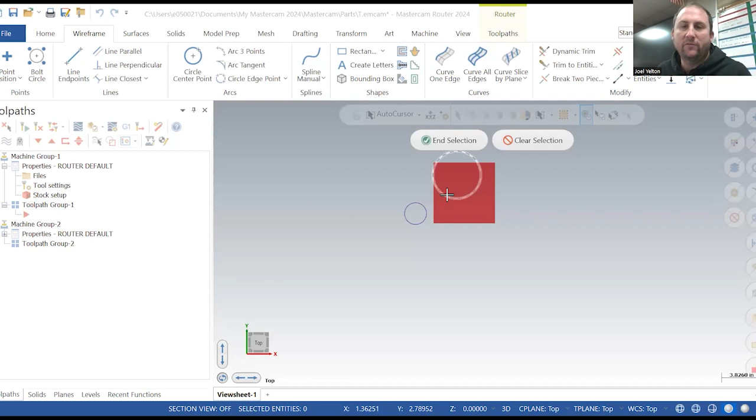All right, people, here we go. Let's see if I can get this. We're on MASTERCAM 2024. It is a little bit different as far as the initial setup, so be patient.

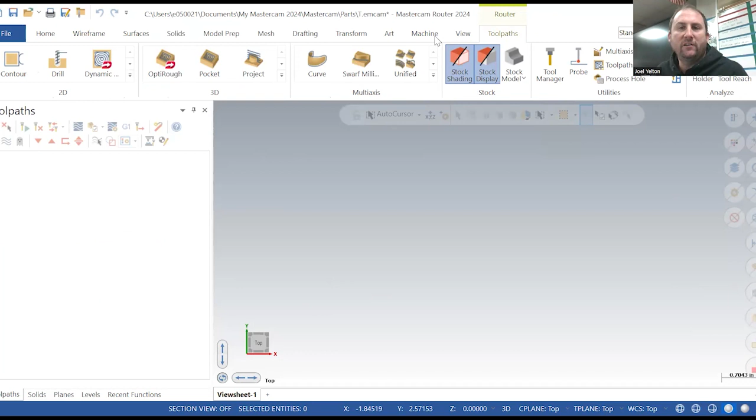Okay, so here we are. I want machine, router, default, just like normal. And I'll show you where things get a little wonky. If you don't have anything right here, let's go to view and just make sure our toolpath tab is on. So there it is. I'm going to double click properties and click stock setup.

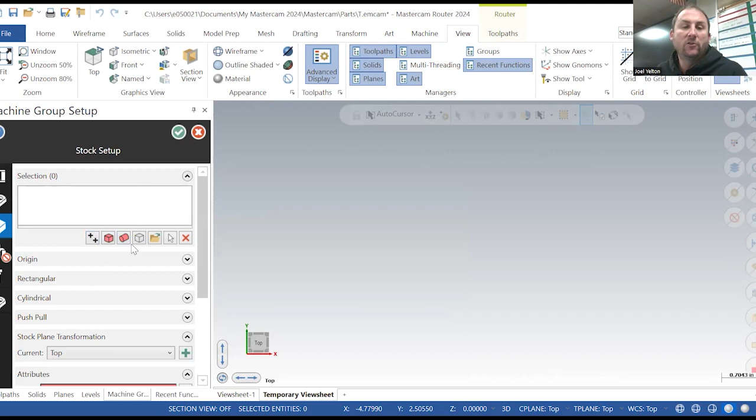And now our piece looks a little different if you had been using MASTERCAM anything up to 2022. So we're going to do this first. We're going to go to add from a bounding box. I'm going to put this at the lower left, and then I'm going to put my dimensions in. So in this case, I'll do 6 by 6 by 1, and I'll hit check. Then I'm going to hit check again.

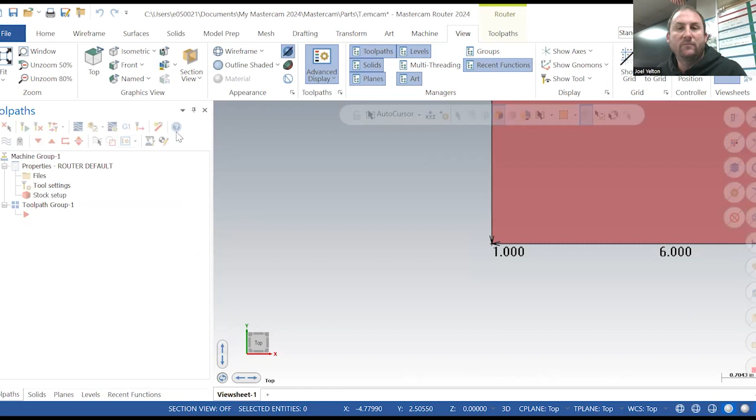And now I'm going to go up to toolpaths right here, and I'm going to hit stock display, and then I'm going to hit this. Now I'll go to view, and we'll go to fit, and make sure you're on top. So we're back to how we normally used to do things if you've messed with this. If not, it doesn't matter. Now you know how to do it.

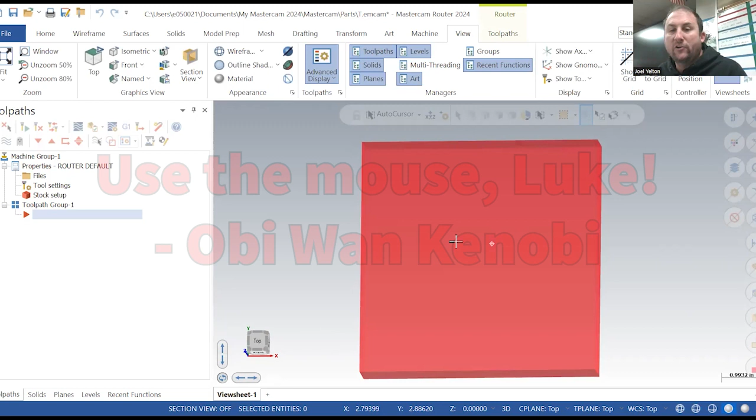So I have 6 by 6. I'm using my mouse. Make sure you're using a mouse. With the center wheel, I can rotate this in 3-dimensional space, all right? And you've got this bar down here that tells you what view, front. So look down here, left, bottom, back, right, top. Now, it's really hard to design if you're not at a perfect flat angle.

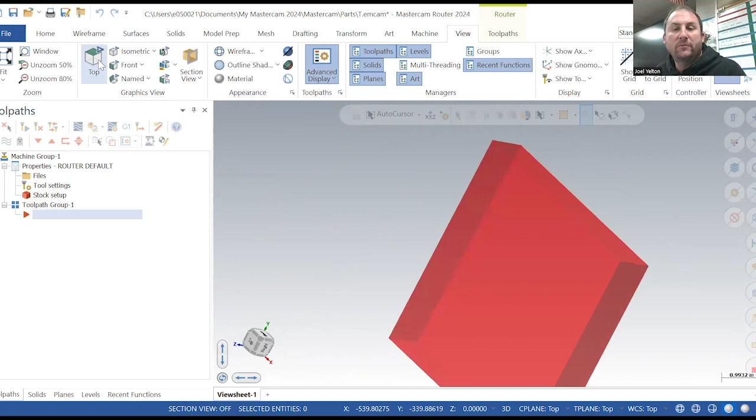So if you mess up by hitting the scroll wheel, just go over here to view, top, and it puts you back. And then you can hit fit, unzoom, etc. So this is just giving you some basics of manipulating the piece. If you want to move the view down, you're going to use the arrow keys. All right, so you can see how I'm tapping those arrow keys.

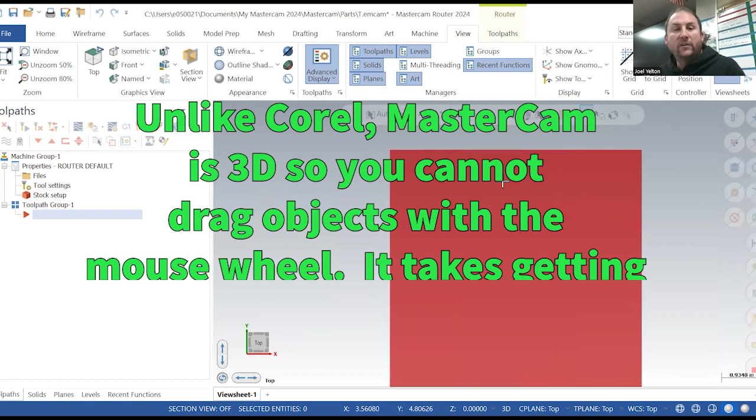And then again, let's just say that you lose your whole piece. I'm holding down. I'll just go to view, top, fit, bloop, brings it back. Perfect. So let's get started making something.

We're going to do something very simple today. I'm going to go to wireframe. And remember that this workpiece dimension is 6 inches by 6 inches. So whatever I'm going to machine, when possible, I want the workpiece to be slightly bigger so that I don't have to worry about hitting any of the jigs or the holders in the workpiece.

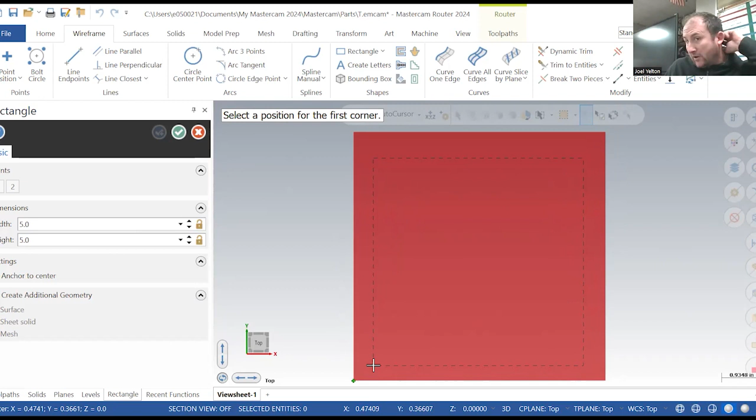To start, we're going to make a rectangle. And let's make it 5 by 5, which, yes, is a square. And then it says select position for the first corner. So if you see down here, look at this X and look at this Y. And if I get down there, they all turn to 0, 0, 0. Okay. So if I have a 6 by 6 box with a 5 by 5 box in it, that's a ½ inch on each side.

What I'm going to do is hit the space bar. It opens up this little box right here. And I'm going to put 0.5 over, comma, 0.5 up, and hit enter. And now that box is perfectly centered, all right? The point of me showing you this is that you understand that you can see where a selected point is.

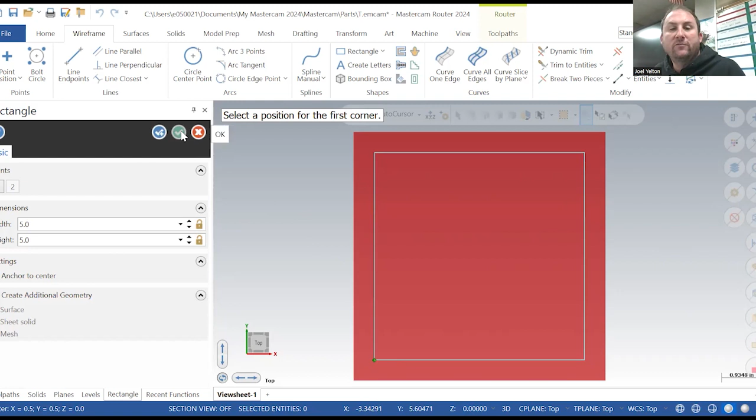In this case, it grabbed from the lower left. But rather than trying to manipulate it with the mouse, which you're never going to get it exact, you can just hit the space bar and type your first 2 X and Y dimensions in. So in that case, we did 0.5 over, 0.5 up. All right, you're good. So I'm going to hit check, the green check to finalize this. And then I'm just going to hit escape to get out of the command.

Now I am still in the wireframe tab, and I'm going to go over here to create letters. And I want you to type your first name and last name. So notice I'm going to say Joel, and then I'm going to hit the enter key and do my last name. Leave it on this default font at this point.

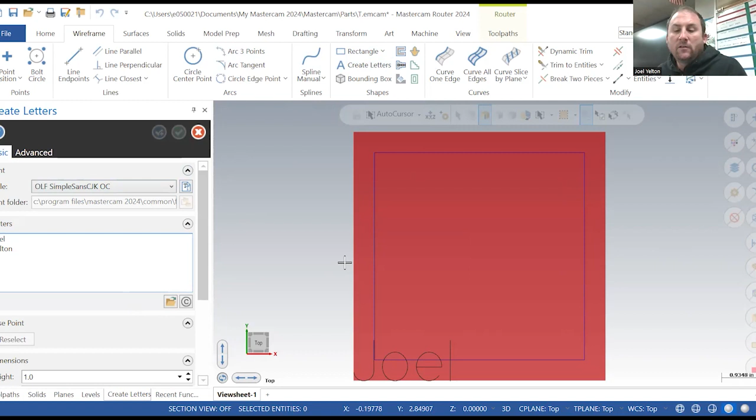I'm going to hit enter. Sorry, I'm going to click, and it puts it right there. All right, so let's cancel that. And I'm going to show you kind of why. So now it still has the last thing I typed, and it's following the cursor. I can put it exactly where I want.

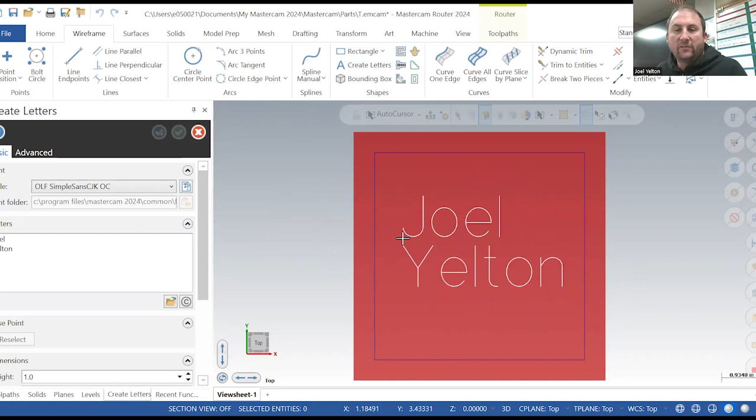Okay, that looks about centered, and I'm going to click, and then I'm going to hit the green arrow.

Now what we're going to do is run a toolpath, very simple, on one part. Go to toolpath, and we're going to go to contour. Before we do this, I'm going to explain what all of these are.

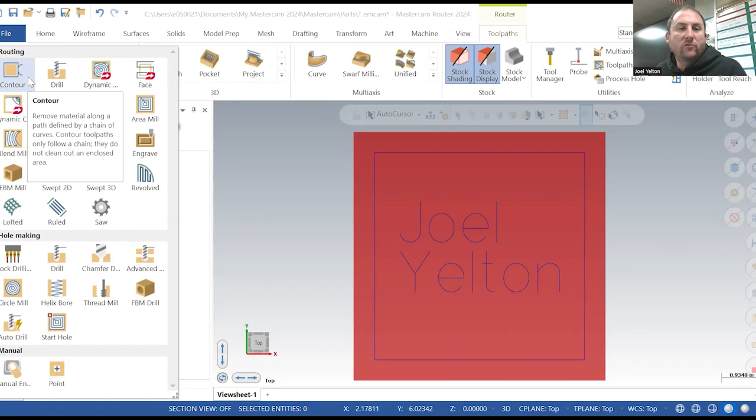We're using 2-dimensional, don't use 3D, it will mess you up. The contour shows this little half loop in a square, meaning it comes in, goes all the way around the square, and comes out. The drill is saying it just makes a hole. We're not really going to mess with these.

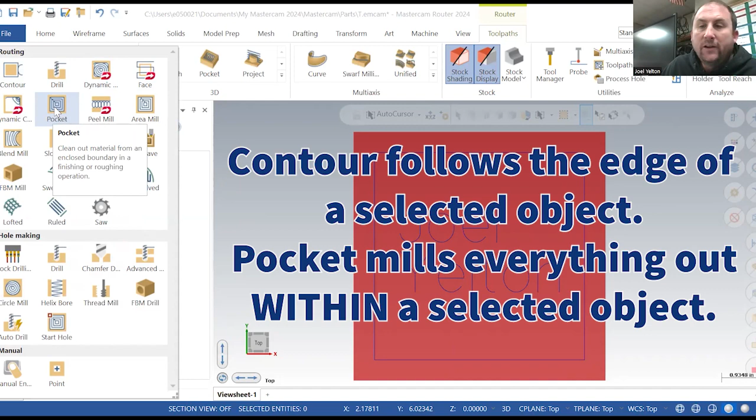The only other one we're going to use in these early videos is pocket, and what pocket does is remove the whole inside out of a selected shape. So contour just goes around the shape, pocket removes everything in the shape, and drill drills holes. So, contour.

Here it's going to tell you the selection method of how you want to grab the piece. You could do a window, and drag the window over the whole thing, but the problem is I do not want to machine the letters at this point, so I'm going to do chain.

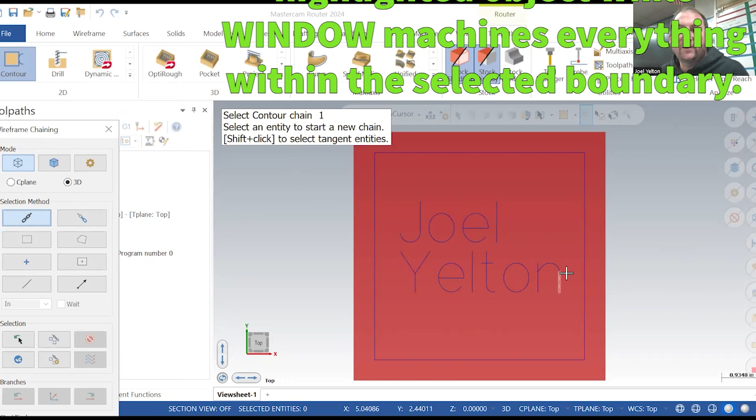I'll click chain, and then I'm just going to click anywhere on the 4 lines that I want to machine. I suggest just getting in the habit of lower left.

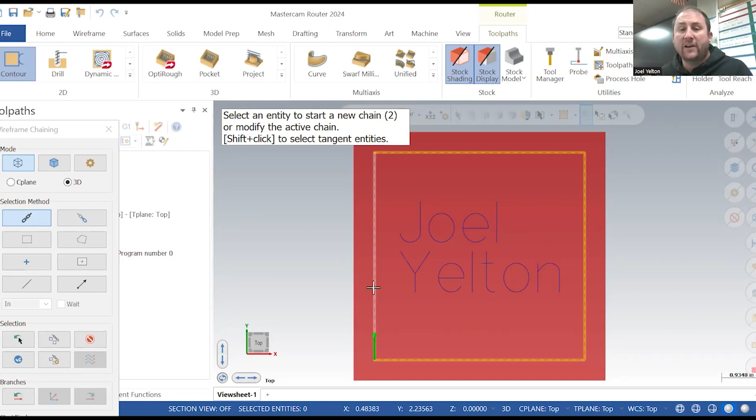Now the first thing we want to look at is the arrow is going up, right? Do I want it to cut in the center of the line, to the right of the line, or to the left of the line? In this case, we're going to say we're going to cut in the center of the line. I'll drag this up, and I'll hit check.

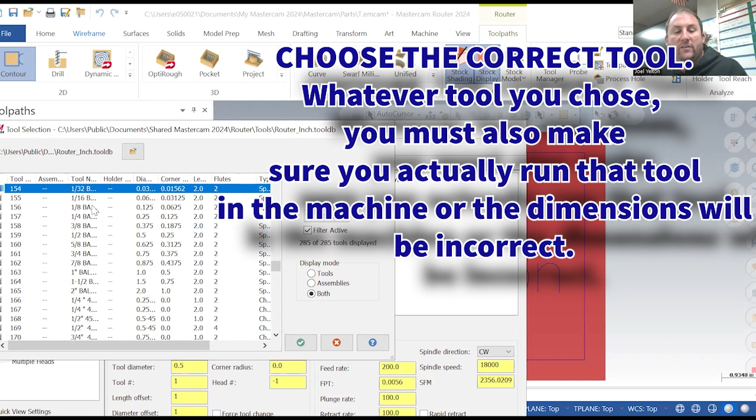I'm going to go to tool, and then select tool from library, click this, and type 145 - there we go, that's a 1/4 inch straight end mill.

I'll hit check, turn this off and hit check, and bring this up where you can see a little more. I'm going to change the feed rate, which is how fast the bit moves through the wood, from 200 to 100, put rapid retract on, and change the plunge rate to 75.

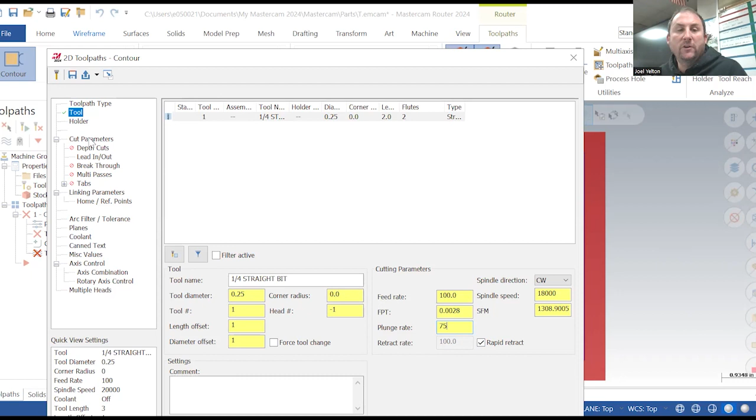That should be good for there. I'm not worried about holder. I am going to go to cut parameters, and right here you can see it's on computer left.

So earlier our arrow was going up. Sometimes it's going the opposite way, right? So it's either going up or down, left or right, forward or backward, whatever you want to call it. Since it's going up, if I wanted to cut to the outside of the line, I would put it on left - notice this changed. If I wanted to cut to the right of the line, I would put it on right, and if I want to cut in the center of the line, I'll turn it off.

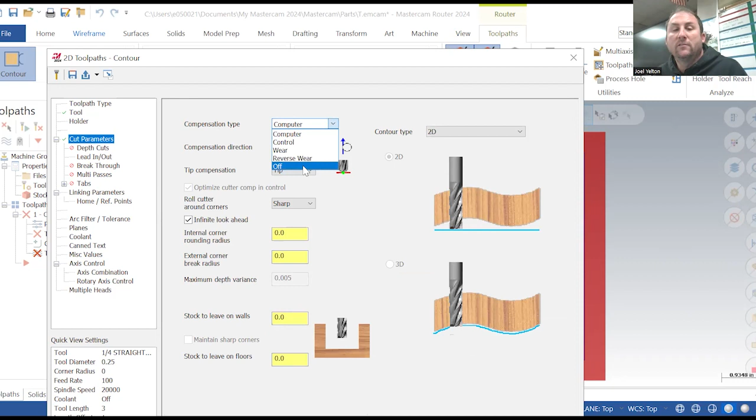So now we're cutting in the center of the line. We're going to put depth cuts on. I don't want to take everything out in one pass, so I've selected depth cuts, and it's saying the max amount it will take is 100 thousandths, which is a little bit under 1/8 of an inch.

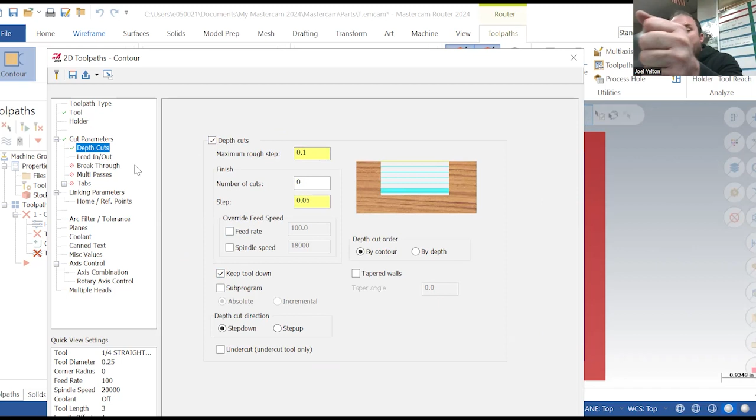And I'm going to tell it to keep the tool down. This way, as it makes the pass, it won't come up, go back, go down, and make the second pass - it will just make the pass, come back, go down, make the pass, come back, go down, make the pass. If we were making 10,000 pieces, this could save us a lot of time, and if we save time, we're saving money.

Lead in, lead out, I'm actually going to turn off. So the little kind of C that we saw when we looked at the contour button, it's going to remove that - you can see the same thing right here, but I am going to turn that off.

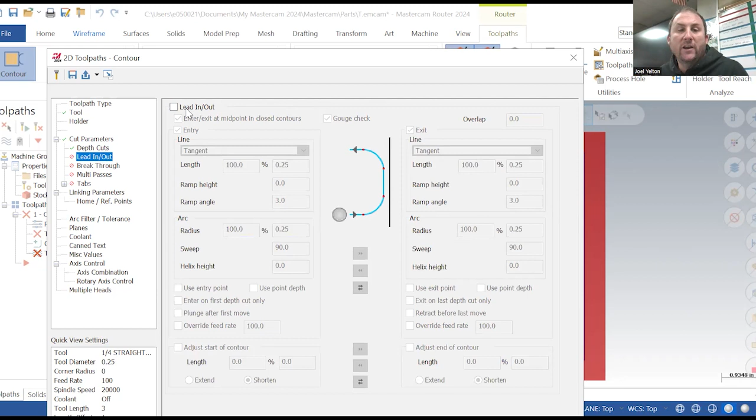Breakthrough, I'm not going to break through right now. Multipass, I do want on, and I'm going to tell it to keep the tool down and machine finish passes after roughing all contours. What this does is instead of machining a pass, making a finish pass, machining a pass, making a finish pass, it's going to do all the rough passes, and then come back and do one finish pass. Tabs, I do not need on at this time.

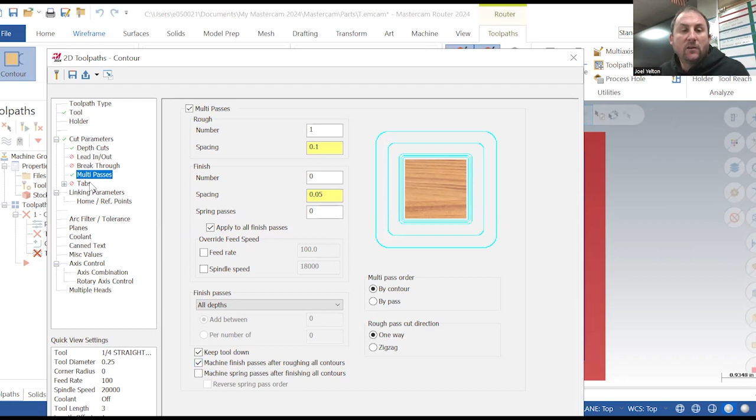On linking parameters, I'm going to turn clearance on. I'll turn it to 1. We're going to go absolute, absolute, absolute, absolute, absolute. I'm going to give you a very quick definition of this. Absolute means that as the machine makes a move, it goes from A to B. The next move is calculated from wherever it ended.

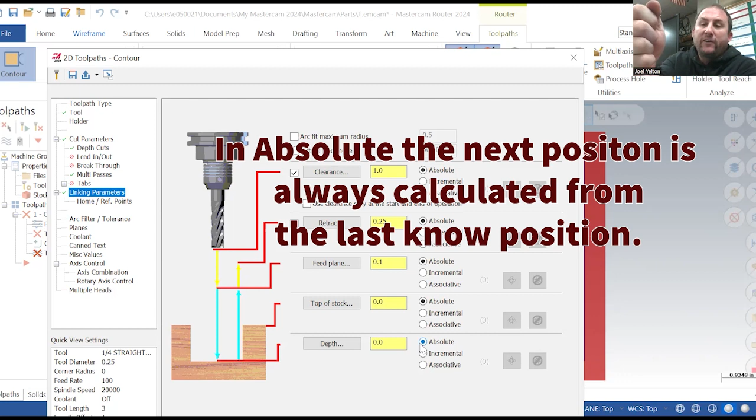All right, so we're at B, and it's going to calculate B to C from that point. Now we're at C, and it's going to calculate C to D from C. If we're on incremental, it is always calculating from the known position of 1, which means that if you have any mistake, it's going to compound onto every other mistake.

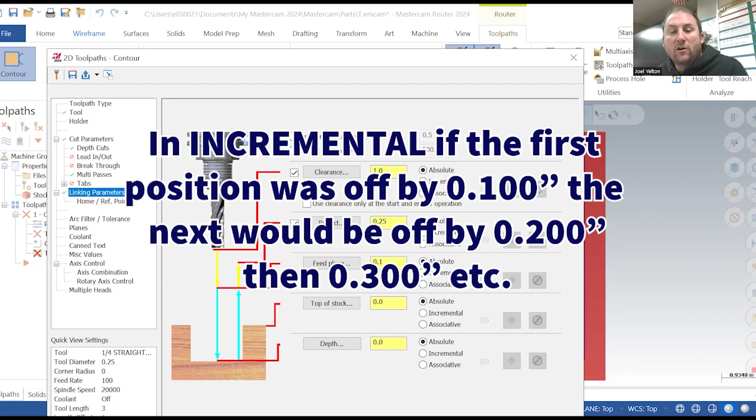So let's just say you are making a series of holes with the drill. If you're on incremental, if the first one is off, it's going to get off by that much every time. And eventually you'll start seeing a big difference. So for what we do, we stick with absolute. Everything else is good. We're going to go to depth.

Super important to note that the depth is going to be negative because we're going to 0 at the top of our 1-inch workpiece, and then we're going to go negative to work into it. So in this case, I'm going to put negative 0.25. That's a negative 1/4 inch. Again, negative 0.25. If you don't put negative, it's just going to hover above.

If you put negative 2.5, it's going to try to drive 2.5 inches down. It's going to wreck the machine, the table, and your part. If you put anything other than negative 0.25, it's going to be wrong. And we can check this by saying, so I'm just going to say that I'm a new student and I accidentally put negative 2.5, and we'll go ahead and see what happens.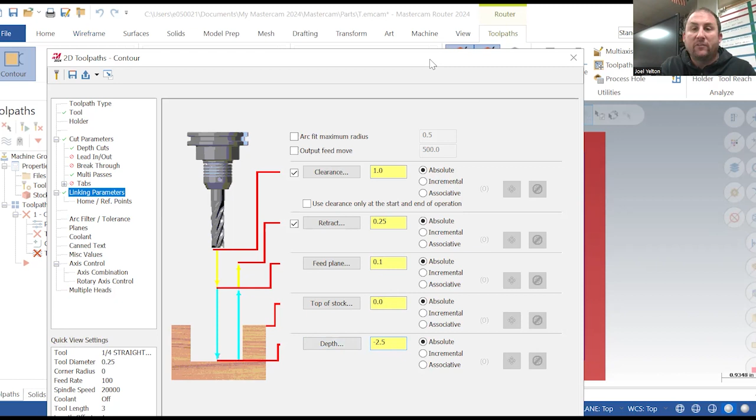So I'll move this up. Try to move this up. So we're going to go 1 inch here. I know it's smaller and harder to see. I apologize. I'll try to fix that in a minute. On the depth, I'm going to put negative 0.2. Sorry, negative 2. And this is wrong, so don't follow me on this section. And I'll hit OK.

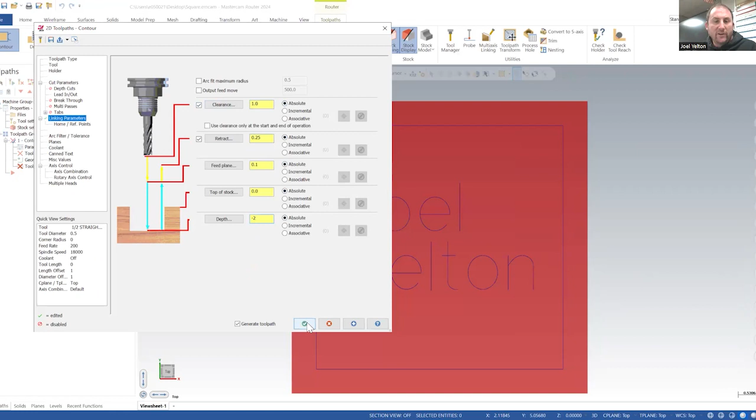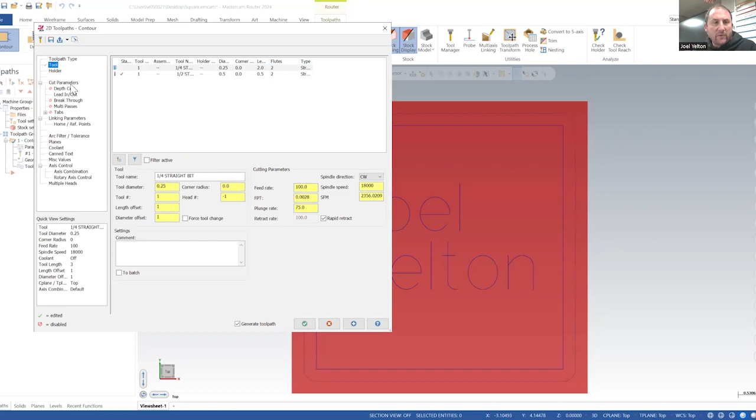Now, the goal was that I did not want to do that. Also, you can see I have this turned on. So I'll go back through my parameters and I'll show you why. I want that bit. I want it at 100, plunge rate at 75, and a rapid retract. I basically have to do the stuff over that you just did. So if you already did this, don't follow me.

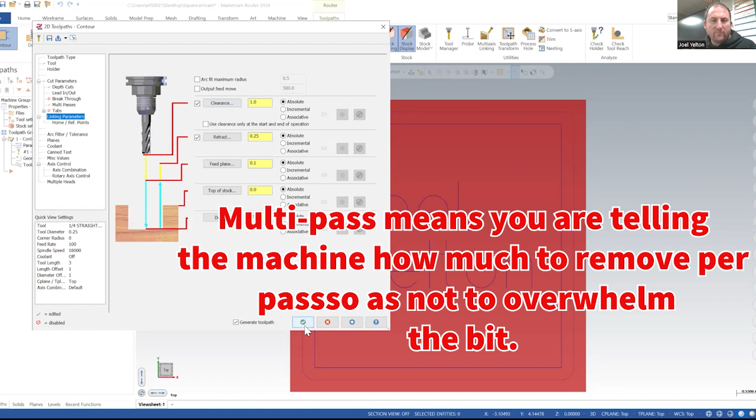Depth cuts, yes. Keep tool down. Lead in, lead out. We'll leave it on for now. I'll show you why. Breakthrough off. Multi-passes on. No tabs. Parameters good. Okay. So here we go. And I'm going to go right here. And this is just a verification mode. It's going to do a simulation for us and show us what it would look like if we actually ran this.

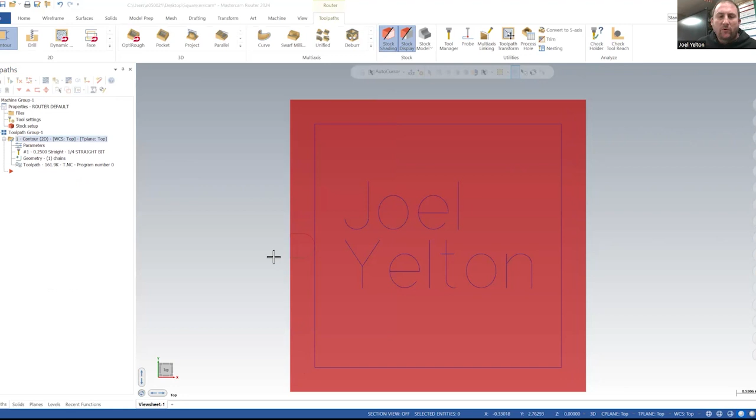All right, so I'll press play, and I'm actually going to tilt it with the wheel so you can see it better. And remember, I only wanted it to go 1/4 inch originally, and now it's gone the whole way through, okay? And it did the lead in, lead out, where it's coming in and then going back out through there.

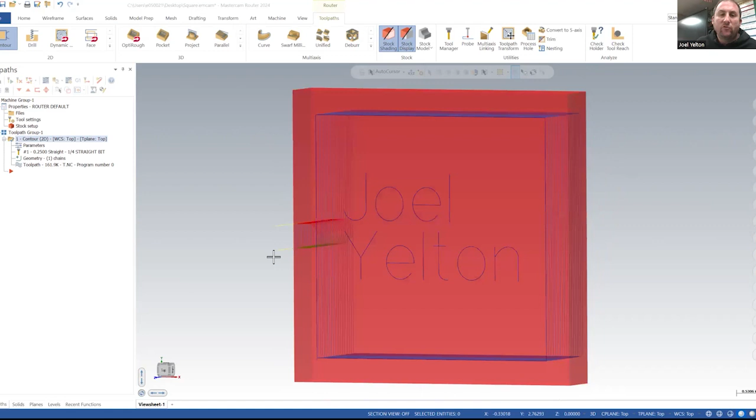And the problem is if I do want to do this, I need to make sure that there's tabs here to hold the piece in, because if you cut the piece freely while this thing is spinning at 18,000 RPMs, it's going to fling it, damage the bit, break the bit, damage your piece, damage the machine, etc. So I'm going to kill this right here. This is just the verification part.

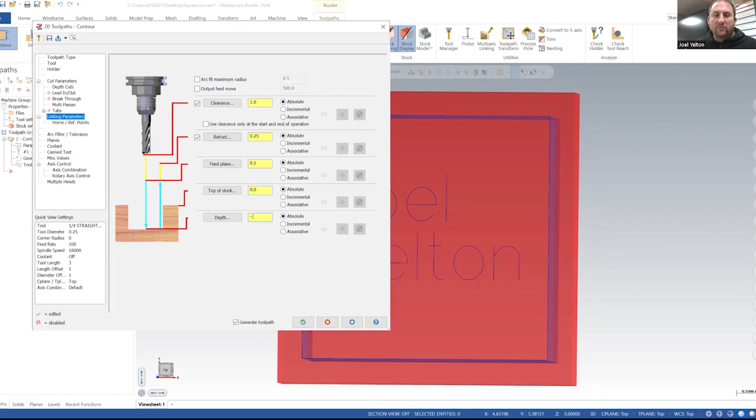I'll go back. I'm going to go to parameters, and I'm just going to uncheck a couple of things. So lead in, lead out, I'm going to turn that off. And then on linking parameters, I'm going to go back to our original negative 0.25. All right, only 1/4 inch deep. I'll hit that. If you get an X over here, you can just hit this, regenerate all selected operations. And then you can go right here to verify.

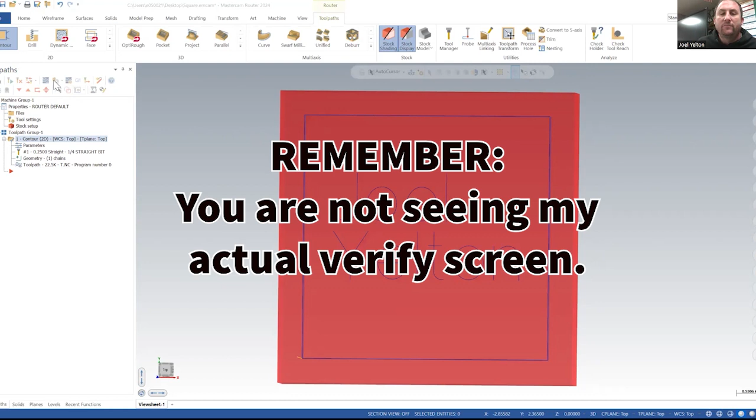I'll hit play, and there it is. So from a 3-dimensional view, we can see it went down 1/4 inch, and that did everything it was supposed to do. I'll kill this. In fact, actually, just position this a little bit where it's 3-dimensional. Just take a picture of this. It should have your name on it, and that will be your grade.